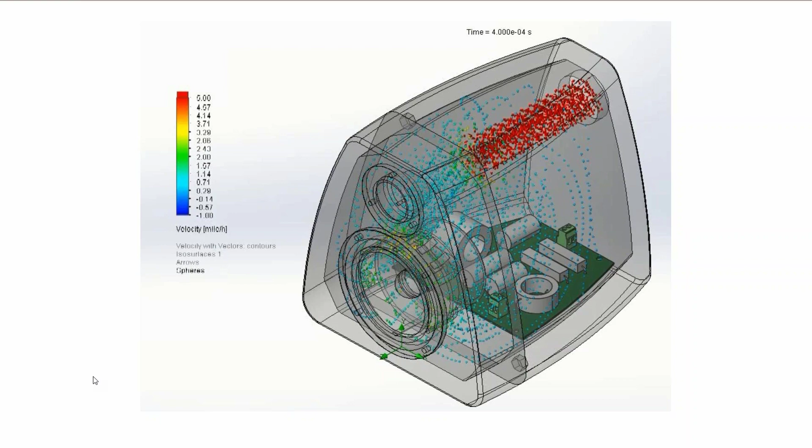So just for your own information, we did run some simulation on this speaker, and you can see at this point we were looking at the airflow through the port tube and how fast that air actually flows through that tube. Another thing we looked at is the speed of the air going around all of the devices inside this speaker. So there's a lot going on inside the speaker. We got to really put our engineering caps on and figure out, are we going to have port noise? There's a bunch of parameters that we had to design around.

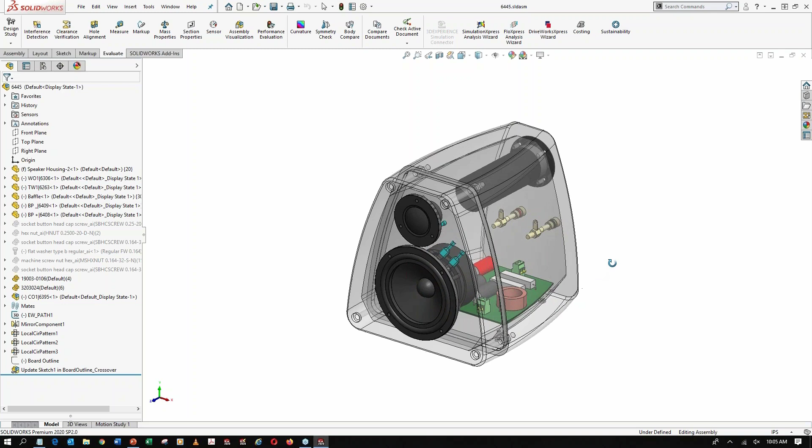In this simulation, you'll see that we actually are building an isosurface anywhere that the air speed is going too fast and it's going to create noise. So one thing that we had to design around was actually having this speaker be between 300 and 350 cubic inches internal volume. So here is a completed design, and you can kind of see this speaker here modeled. This is fully populated, the assembly is complete.

But what I'm going to do is I'm going to model this speaker completely from scratch. Everyone on here is a SOLIDWORKS user, and at the end of the day, you're going to have to hit File New at some point and model something from scratch. So no tricks up my sleeve. We're going to model it completely from scratch. So let's do that.

First, I want to point out that there is a front piece and a back piece. They slide together with these lips. You can see that they slide together, and there's 20 thousandths of tolerance, a gap around the sides, so that they actually will fit for sure. So I'm going to close this thing completely. You can see the SOLIDWORKS 2020 emblem. There is nothing open. So let's hit File New. We're going to choose a part in inches, freedom units.

Now, I'm going to talk about good practices as we design this as well. So not only are we going to model it from scratch, we're going to talk about best practices and good things that you should be doing while modeling. One of the things I like to describe that you won't see in any training manual is bulletproof modeling.

So everyone on this webinar has probably opened a model that their coworker made a change to. Definitely not you. Definitely their coworker made a change to. And one small change just made the model explode. Well, if you have bulletproof practices, bulletproof modeling skills, that change should not blow everything up. You should be able to go in, make small changes, and your design intent drive the way the model changes.

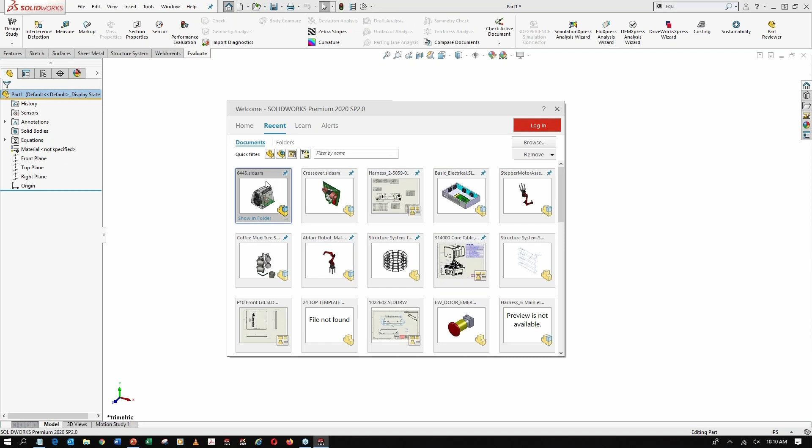Now, in SolidWorks, most SolidWorks users, we like to make box. We extrude box. We pull out of page, we make box. It's very easy. We make very orthogonal or geometric shapes, right? But some of the hardest things to do are, in fact, those curved shapes. And if I open this model up again, you'll see that there's a lot of curvature to this model. So you can see it's curving in multiple directions.

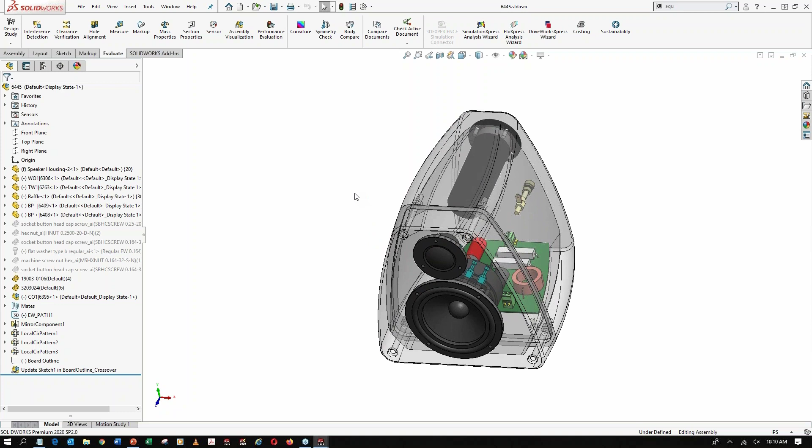And so this is some of the things that people get a little timid about. And we need to be able to have all those tools in our tool belt to be able to make shapes that are not just real blocky and me extrude box. So we're going to do that here in this brand new file. Now, I'm going to create a sketch on my top plane. And the first thing I'm going to do is I'm going to use this midpoint line. Now, this midpoint line, this is a really good one, especially if you need symmetric parts to build around your origin. So at that point, I just started with the midpoint line.

Now I'm going to use a regular old line. Now this is going to be the depth. Now, in case anybody didn't know, you can click on a line and you can say for construction geometry. You can switch it over to a piece of construction geometry. And then when I draw this other line, I could use a midpoint line, or I can pick up this midpoint reference and make it coincident with the end here, which is perfect.

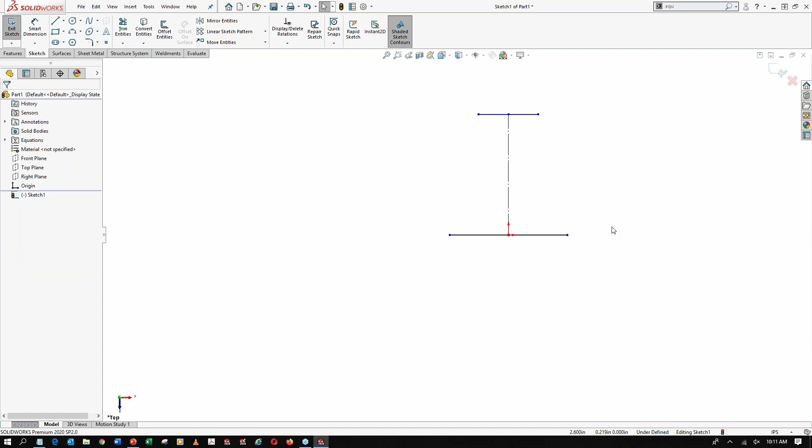Now I'm going to pick up a 3-point arc here. So 3 clicks is what it takes, said the Cookie Monster. So there we go. We have our original shape. Now I need to define this, because best practice is to always work with fully defined sketches.

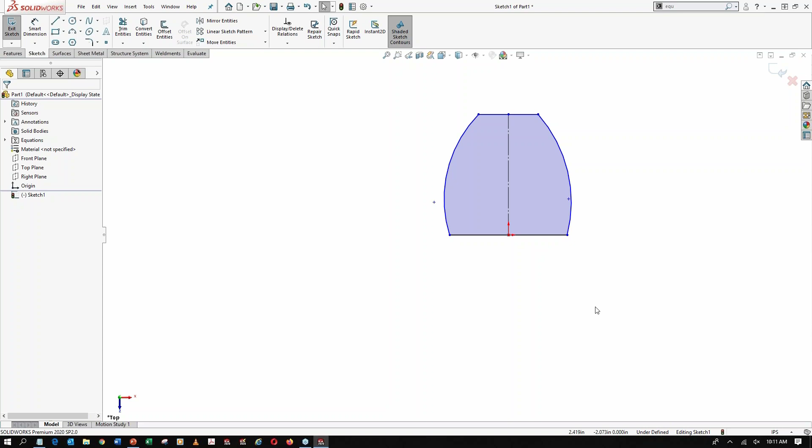This is an underdefined sketch, as said in our status bar down here in the bottom, so I do need to define this. So this one is going to be equal. So just like in Excel, when you hit the equal key, that is going to show us everything that we can link this to or start an equation. In this case, I'm going to go to global variables, and that's going to be equal to the bottom front, which is BF. And I can hit my green check, and you'll see that you get a little symbol indicating that it is linked to a variable.

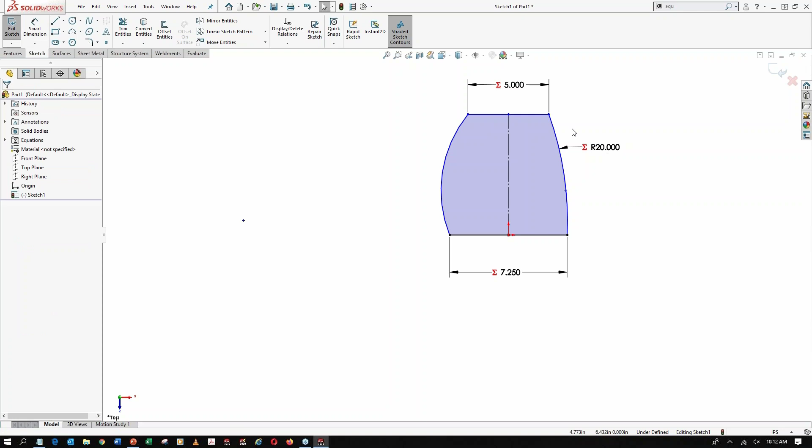I'm going to do the same thing for the backside here. That's going to be equal to the global variable of bottom back, which is BB. I can hit my green check. Notice that I'm not dimensioning. I mean, I'm dimensioning, but I'm just linking it to a value that already exists in this model. Now this is going to be equal to the global variable of curves, nice smooth curves on this speaker. And I'm going to make that one and this one on the other side equal. I like to use my context toolbar. If you're not using it, you probably should.

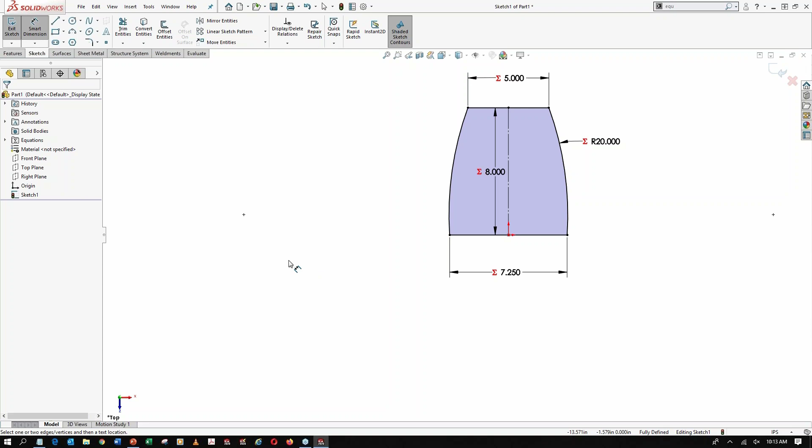One more thing that we're going to have is this one is going to be equal to a global variable of D for depth, and green check. Now this is completely defined. We have a fully defined sketch as defined in our status bar. So that's the way we want to have our sketches, is completely defined. Now I can get out of this sketch.

Now, to make something that is a little more complex, well, you could use an extrude, but we're going to use a little more complex features. You could use either a sweep or a loft. In this case, I'm going to use a loft. But to use a loft, I need another shape to go up to. Well, before I do that, I have to sketch on a plane that's up there. Well, I sketched on my top plane. So what I need is another plane up here.

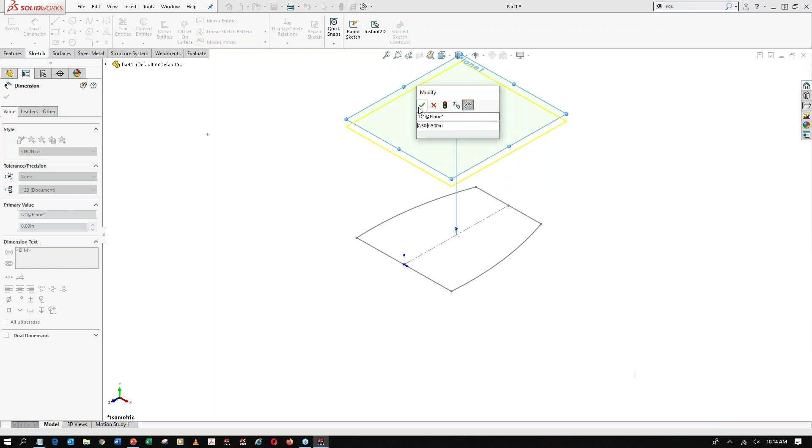So I'm going to hold control and I'm going to drag up to create an offset plane. Now, ideally, what you would do is hit equal and then link it to a variable, but you can't do that. That's just a SolidWorks thing. So I'm just going to hit my green check. But what you can do is you can link that offset plane depth to a variable, but you have to accept the plane first and then double click on the plane. And then we can double click on that dimension, and then we can link that to a global variable of h, which is height. A quick rebuild here, and you'll see my plane is in the correct place.

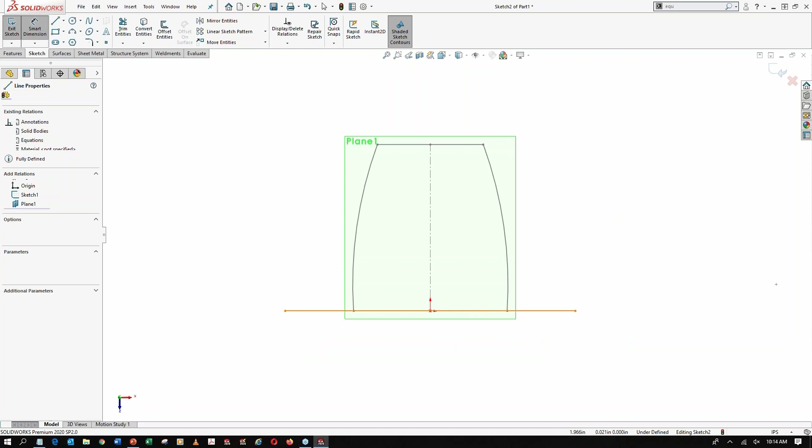I can now sketch on said plane, and I can do exactly what I need to do here. So I can draw another line again. Obviously, we could use our midpoint line if you wanted to, or you could pick up that midpoint reference and put it on the origin. And at that point, I need to define the width of this line. And that's going to be equal to the global variable of top front, or TF.

All right. Now, the next thing I need to do is do the back. So I'm going to use another line back here. You see we can draw another line. Of course, you can pick up this midpoint relation and hold control and put it exactly where you want. And then we can define that one.

Now, I use a lot of mouse gestures, and that's where you right click and you can drag through any one of these commands that you have. If you're 10,000 IQ, not necessarily that I'm that, but I've been asking for a second level for a long time. And I finally got smart one day. And instead of creating a second level on my mouse gestures, I just mouse gestured me hitting my S key. Because hitting your S key, you can then right click and customize the S key. So now just mouse gesture hitting your S key, and then you can find everything right there and customize it all. So just a little tip for you. If you like mouse gestures, then mouse gesture your S key to give you that second level.

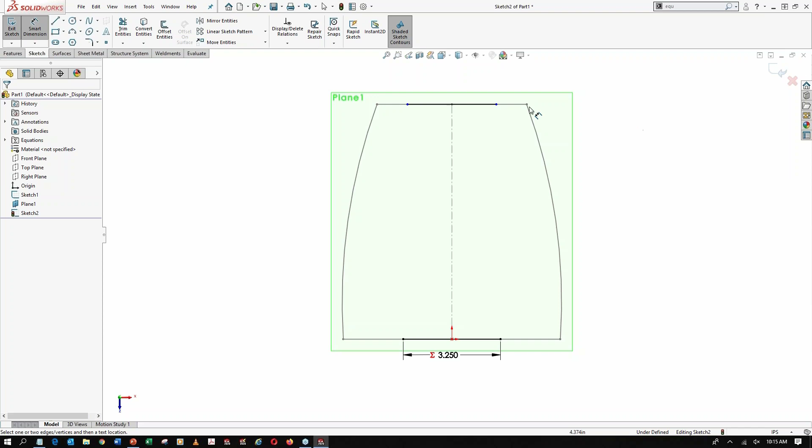All right, now I'm going to link this one to the global variable of TB, which is top back. Hit my green check. I need another 3-point arc. So go from here to there and 3 clicks.

Said the count. And then I've been watching too much Sesame Street with all this quarantine stuff. So maybe some of you can relate.

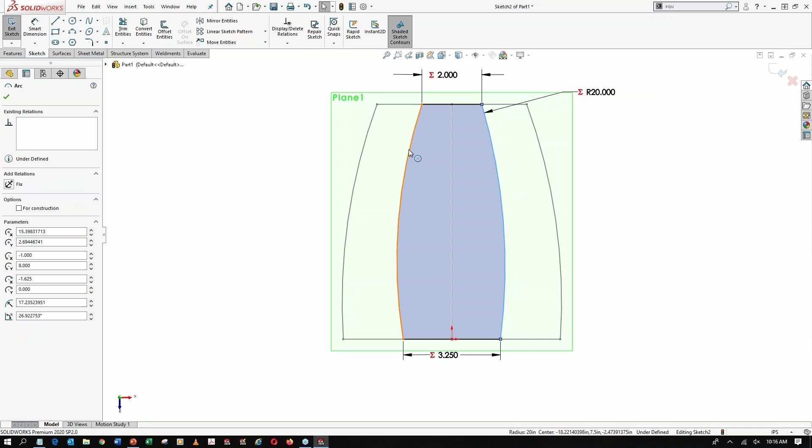This is going to be equal to the global variable of curves. And hit my green check. Again, I'm going to link this curve to that curve, making them equal, and then I can get out of this sketch.

Now, we have our framework here for our speaker, but I need some nice curves for this to follow. So on my front plane, I'm going to create another sketch that just contains 3-point arcs. So from sketch to sketch, creating like a little wireframe of this speaker. And of course, these are going to link to the global variable of curves. Hit my green check. And again, I'm going to link both of these where they're the same curvature, and then get out of this sketch.

Now, there are faster ways to do this, but I'm going to go the most robust modeling way to do this. So I could have used 3D sketches, but I'm going to use 2D sketches in this scenario. Now I'm going to take this front plane because I need to sketch the same thing on the back. I'm just going to create an offset plane by using control drag.

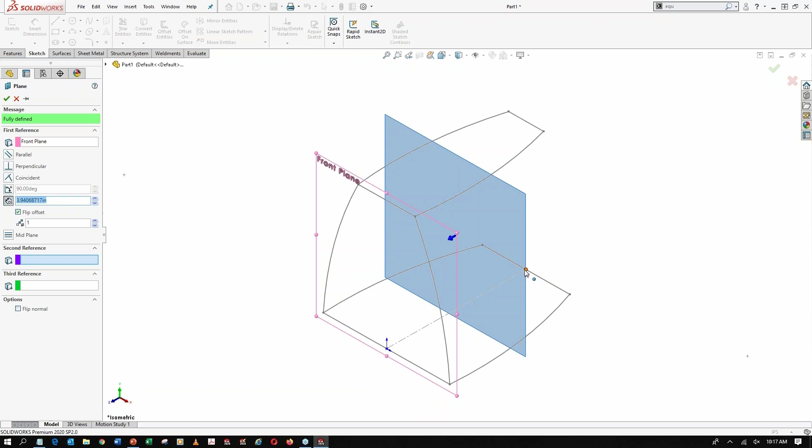But I want this model to always have a plane on the back side back here, so I can link this as an offset plane that pierces that point. So I can then hit my green check. Now, no matter what that depth changes to, this plane will always follow. So then I can open a sketch there and do the exact same things.

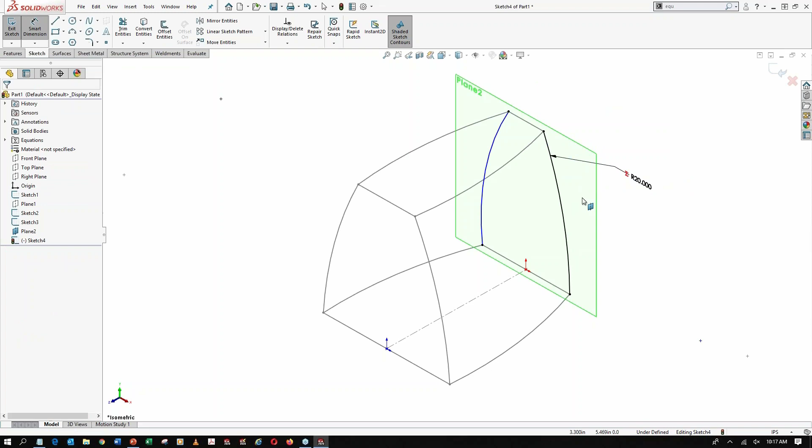Get a 3-point arc here, and then link this to the equation or the global variable of curves. And last time, make these equal, and we're good to go. Personally, I like to hide my planes, but you'll see now we have a wireframe of our speaker.

Now remember, our design challenge is between 300 and 350 cubic inches for an internal volume. Well, right now we have 0 for internal volume, so we're pretty far away. But what I need to do is go to Features and do a lofted boss base. If I loft from this sketch to that sketch, that is exactly what I need, except you'll see that our curves is going very prismatic from point to point. So I want this to follow our curves.

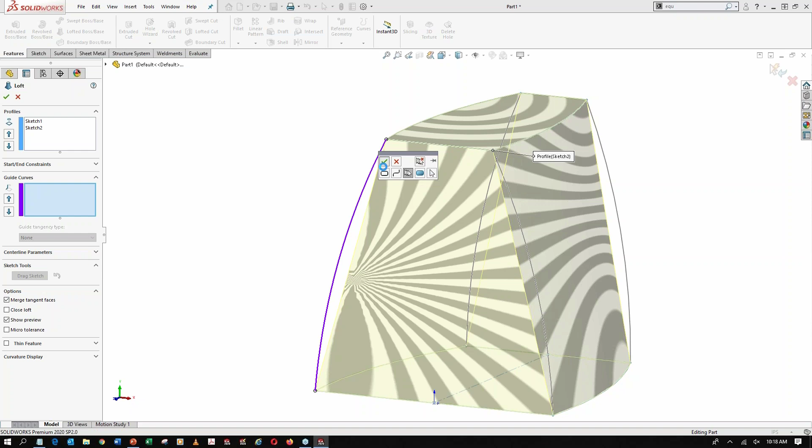To do that, I need to use a guide curve. Now, when I choose a sketch that has 2 open profiles in it, it's going to prompt me to use my selection toolbar. And that's totally fine. We'll select that group, hit my green check. I'm going to do the same thing over here. The same selection toolbar pops up. You'll see what these guide curves do is they pull it out and make it follow that guide curve.

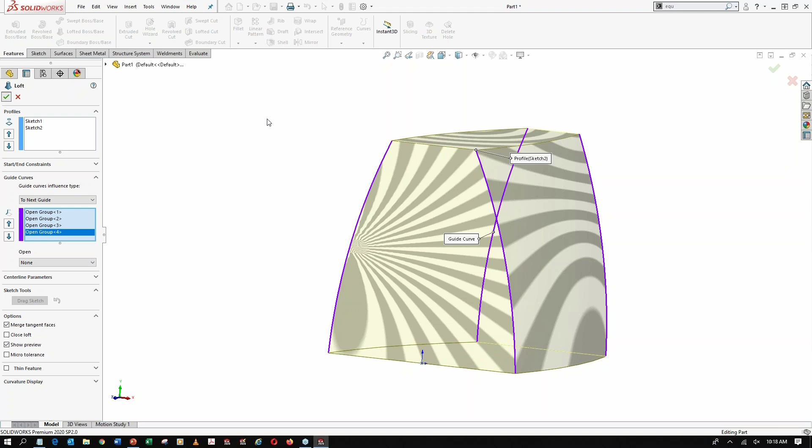So I'm going to do 2 more times. We're going to get back here, use that one, and then finally back here and use that one. Perfect. Now we're following our guide curves, and I can hit my green check. You'll see that we have some nice solid here. It's curved in a couple different directions.

But now what I want to do is check the volume. So I'm going to go here to evaluate. I'm going to go to my measure or mass properties. Let's go to mass properties. You'll see my volume is 326 cubic inches. Well, if I was shooting between 300 and 350, I would say that's smack dab in the middle. So I'm going to say that's okay.

But this is an internal volume, and this is a solid. So as you can see with our section view, I can prove that this is in fact a solid. So what I need to do now is I need a 1/2 inch wall thickness for my speaker. So what I need to do is create an offset, okay? Now, I can use the feature called shell. Now, you guys are probably very familiar with shell, and it's going to remove an internal volume.

Well, there's another feature inside of shell. Well, it is shell. But what you can do is you can say that you want a 1/2 inch wall thickness. And then you can check the option for shell outward. Now I want everyone to pay attention. When I hit my green check, it's going to get a little bit bigger. You see it kind of jump out just a little bit.

What it's doing is it's taking the faces that exist and it's offsetting it by whatever value, and that's a 1/2 inch, and then removing the internal volume. So it's like an opposite shell. So now you can see that we have the exact same volume inside that we just had as a solid. So that's a really good technique that you can use to create a cavity inside of a part. So first thing I want to do is I want to check the internal volume and make sure that it is in fact still between 300 and 350.

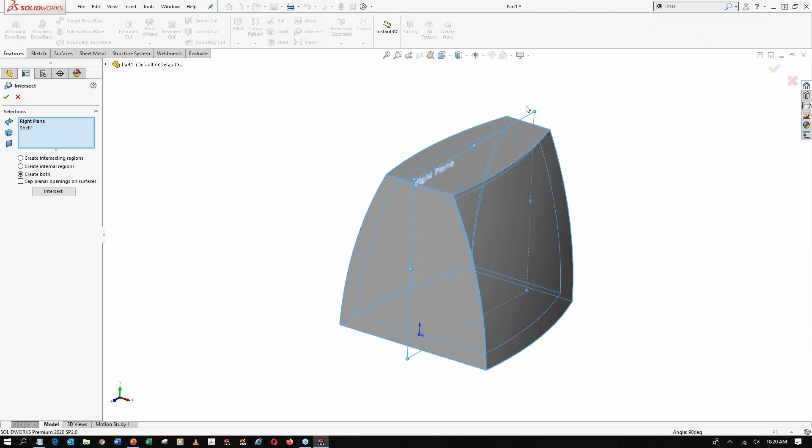A tool that I can use to check an internal volume is I can grab a plane that completely intersects that space and that body, and then I can launch this tool called intersect. Intersect is one of my favorite tools because now I can create an internal region. When I create these internal regions, I don't want to merge the result, so I hit my green check.

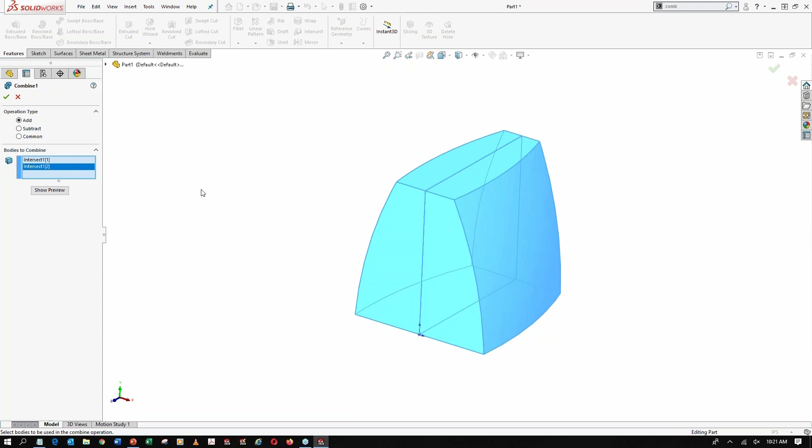Hitting tab on top of this model, you'll see that I have 2 internal pieces. I can then combine them together. This is like a Boolean addition or subtraction. In this case, I want to add both of these solids, and the reason I have 2 is because it was split down the middle by that right plane. But we were then able to get the internal volume of the overall speaker.

So now I can add those together and evaluate mass properties, and don't include the hidden bodies because we have that thing hidden. You'll see that I am at the exact same size that I was earlier. So now I can come back and delete that body, that way I just have a feature in the tree. We're deleting that combine, and then I can re-show my speaker. And again, this thing is hollow.

Now what I need here is I need to add some fillets, so we need this thing to be nice and rounded. Let's go back up to the fillet command. Now I want to point something out. Everybody uses manual fillet, well, most people use manual fillet. There is also a FilletXpert.

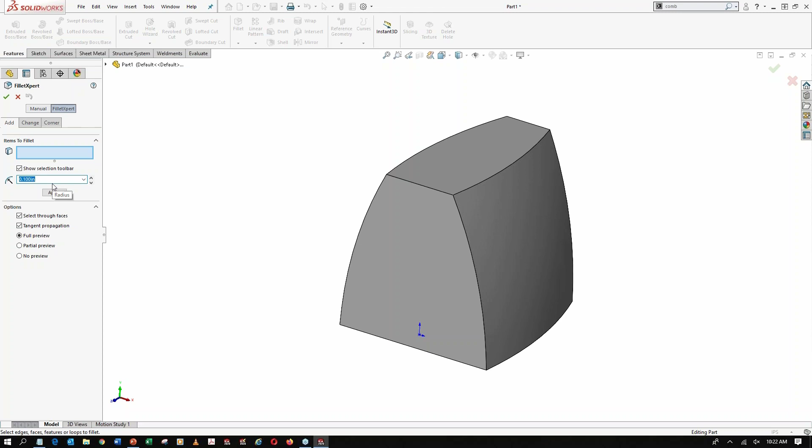What you can do is add multiple sizes of fillets in one go. So I can say that I want a 3/4 inch fillet, and I'm going to add it to all 4 of my external corners, like that. And then I can hit apply. Then I can come back and say, you know what, I want to now add an 1/8 of an inch, and I want this to go all the way around the front and all the way around the back, and then I can hit apply. Notice that with this green check, I added 2 fillets at 2 different sizes in the same command.

Now I have 2 pieces that this is going to have to be. So I'm going to need to cut this, but I'm also going to need to screw them together. So to screw them together, I need some space for my 4 mounting bolts.

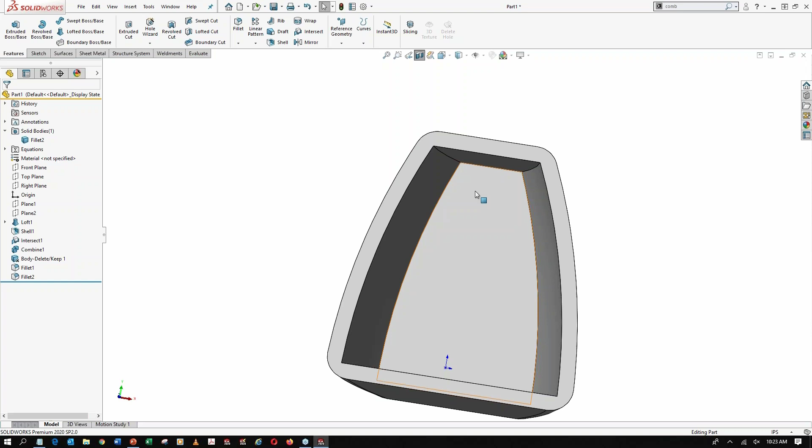Now if I cut this model and section it and accept that section view, I need some material to follow this edge so that we have some meat there so that we can actually put a screw. One thing we could do is just extrude a boss, but I want something a little more sexy, a little more smooth that can follow our speaker contour.

What I can do is create a sketch on this back face, convert the entities, and then draw a line. When I convert those entities, it's going to pull all those edges right over there onto this sketch so that I can use them.

Now on this one, I want this to be a specific distance across. So for the back, I want this to be a 1/2 inch wide, and then from point to point, I want that to be a 1/2 inch tall. So a 1/2 by 1/2.

Now I have too much here. What I can do is trim away, get rid of all the stuff that I don't need. Now I want to point something out, this is something a lot of people haven't realized. There are these red dots. If you go too far and accidentally cut too much, obviously you can hit Control Z, but if you just keep holding and then back up through that red dot, you'll see that we can undo the things that we cut. So just keep that one in your back pocket.

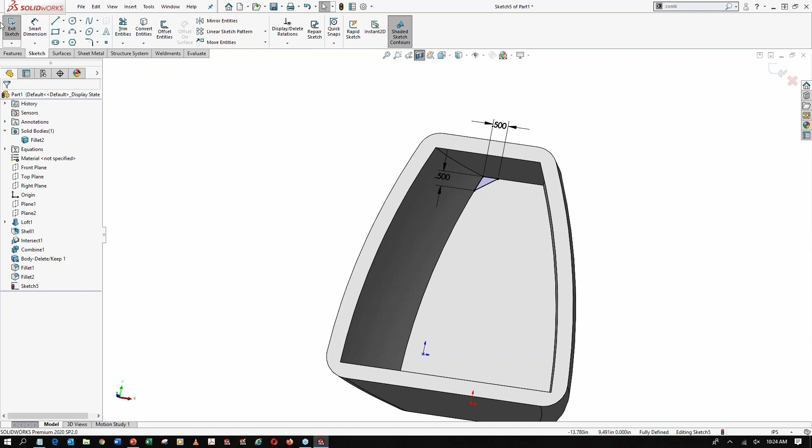I can then get out of that sketch, and I'm going to create another sketch up here that converts these entities again, and I'm going to create one down on the bottom. So I'm creating sketches that we can use to loft to create our mounting bosses.

So this one, bottom back, is going to be 3/4 of an inch wide, a little bit bigger, and then it's going to be 1 inch tall.

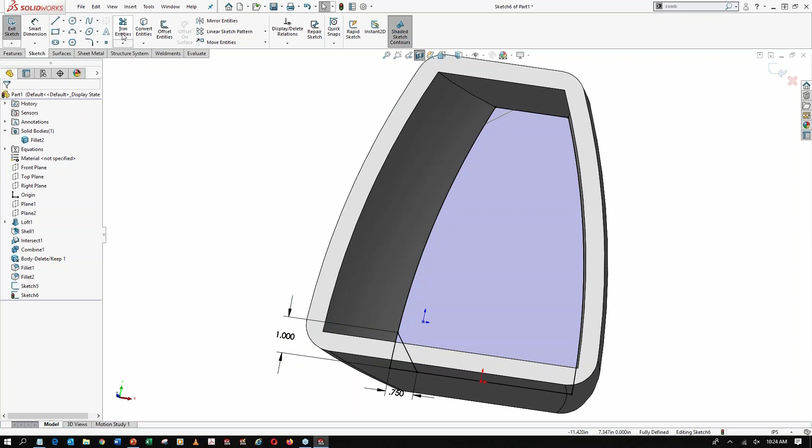Now again, I want to make sure that I only have a single closed profile in here, so I use my trim entities, get rid of all that, and once it highlights in this blue shaded color, that is SOLIDWORKS telling me that my sketch contours form a closed contour. All right, now I can get out of there.

I have my two sketches in the back, but now I need to sketch in the front. If I hit section again, I need to flip the direction that I'm sectioning, and then I can sketch in the front of this thing. So now I can create a sketch on this front face and do basically the same thing, convert the entity, and then draw a line that goes from that edge to this edge, and give this a height.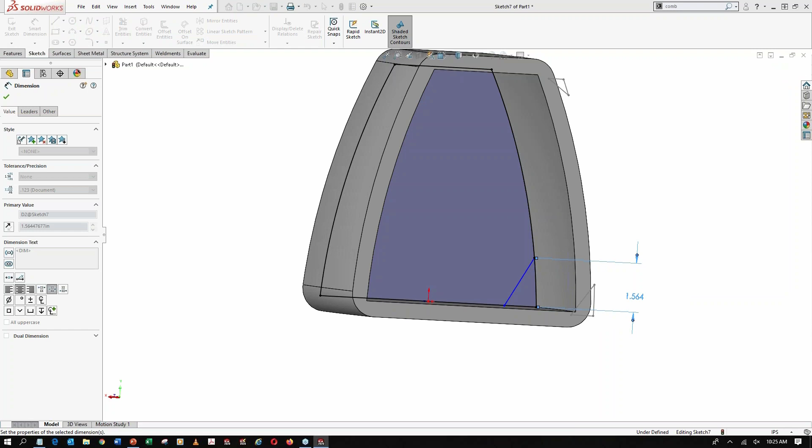So from vertex to vertex, that's also going to be 1 inch tall. And then from that vertex to that vertex, that's going to be 3/4 of an inch.

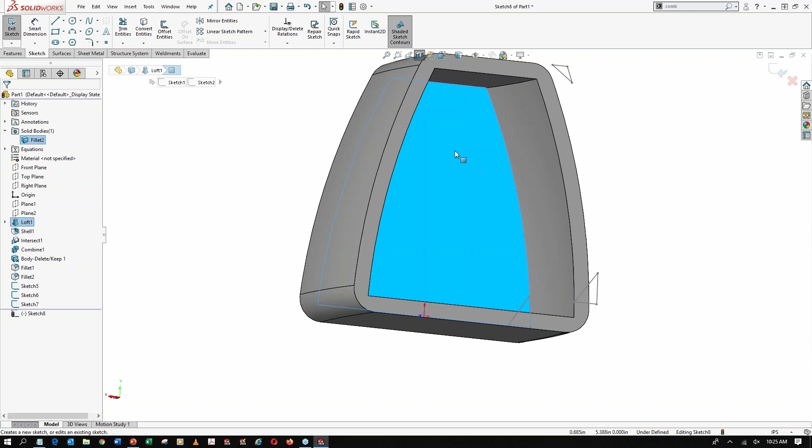Now, this is one of those things that you could also link into your global variables like we talked about in the beginning, or this is something you can do on the fly. Best practices say that you would probably link this into your global variables, and that's okay. It's going to be, just like I talked about earlier, a better place to go to one stop and make all of your changes.

One more sketch here, convert these entities, draw another line, and then hook this up and make them coincident. And then finally, the top front is going to be 3/4 of an inch tall, and it's going to be 3/4 of an inch wide.

Remove all of my extra stuff using our trim command, and I can get out of my sketch. Now I have 4 sketches here, and I can turn my section view off. Now with these sketches, that's exactly what I need to do a loft, so from one profile to another.

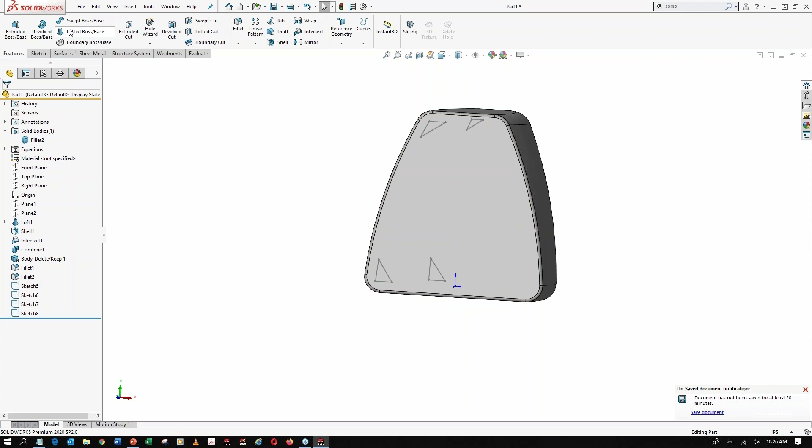Now I can go to features and do a lofted boss base. Now I'm lofting inside this model. So if I loft from there, you see I get my preview and I can hit my green check, and it succeeds, but that might not be exactly what we want.

And so let's flip this and look inside this model. So if we're 3D printing this, this is going to be a huge design challenge. What we need to do is make this loft follow the curvature of the speaker.

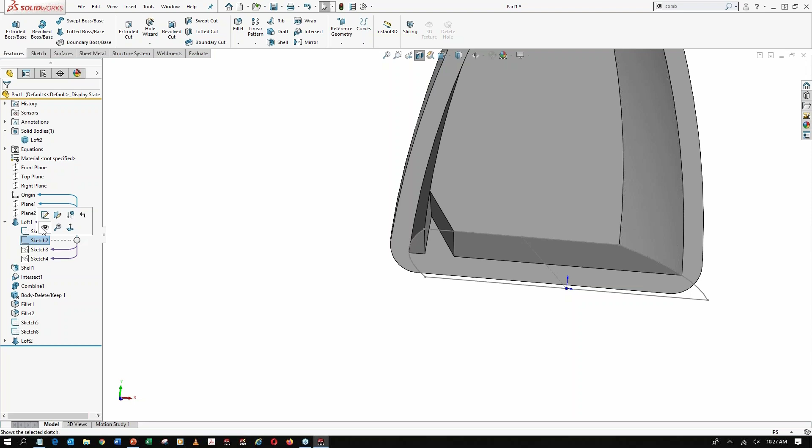So to do that, I can then go to my original loft and show the sketch for the bottom and the top. Now, what we can do is leverage these sketches so that we can use them again. So let's go edit our loft here.

And this time I'm going to use a guide curve. But if I choose this, notice that it grabs the entire sketch. That is not what I want, so I'm going to clear that selection.

Instead, I'm going to right click and use my selection manager so I can grab just one segment inside that sketch and then hit my green check. You'll see now that if I hit my green check, this loft is drastically different. It follows along the curvature of our speaker.

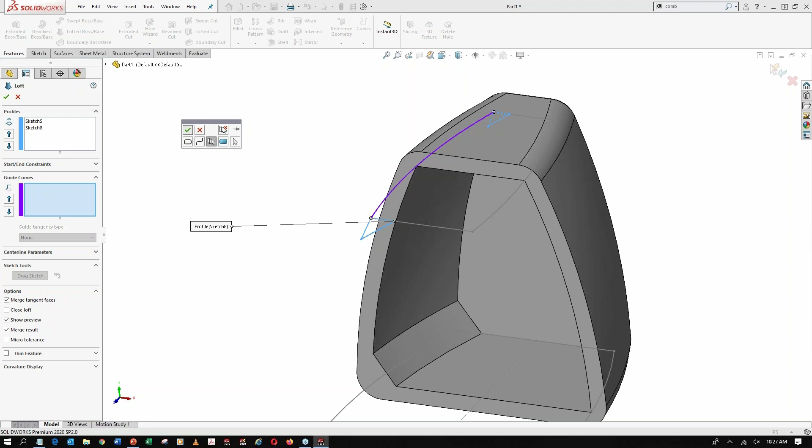I'm going to do the same thing for this top side, but I'm going to leave it sectioned so you can see it happening. Loft from this shape to this shape, and obviously it goes straight forward. Guide curve, I'm now going to use my selection manager and use this to follow, hit my green check, and then hit my green check again to accept it. So you'll see that we have a lot more meat there now, so we can put our mounting bolts.

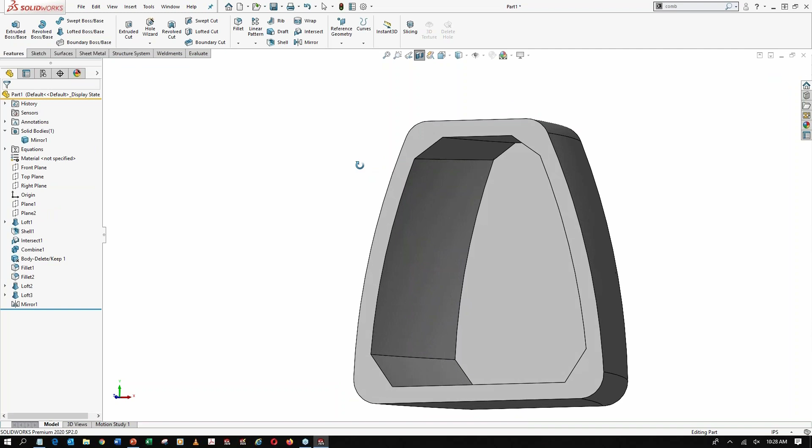Now, to speed myself up, I should probably do that all over again. I'm just kidding—please don't, unless you're getting paid by the hour, I guess. What we can do instead is take both those lofts and the right plane, and use the mirror function so that we can mirror them to the other side, creating some symmetry. So perfect, we have sped ourselves up, and we have designed this speaker so that it has a good internal volume.

Now, I want to do something really quick. I want to do another intersect to check that. So let's go to the right plane and this solid, do that intersect command, and we're going to create an internal region and hit my green check.

Again, I can hide this, and we can take both of these and combine them together. And once you combine them together, that solid and that solid, we can then do the evaluate mass properties. You'll see we're at 317 cubic inches. We're still within spec, so we're good to go.

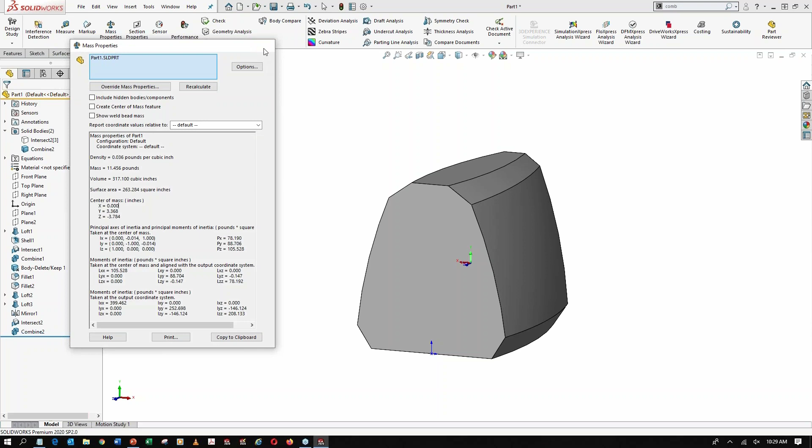I can just delete both those features, or you can leave them in your tree—it is totally up to you. But now that we're back to looking at our model, and you see it's hollow, what I need to do is cut it in half. So to do that, I'm going to create a sketch on my right plane, and I'm just going to draw a straight line. Now, it's going to be a fully defined straight line, but it's just a straight vertical line.

I'm going to start to dimension this thing, and I want this to be equal to the global variable of height times 1.5. So you can even use those global variables in equations to modify those dimensions.

Now, I want the front piece to be 1.25 inches back. So this is how big our front and back piece will be. We're going to create a housing basically, and then a front cover.

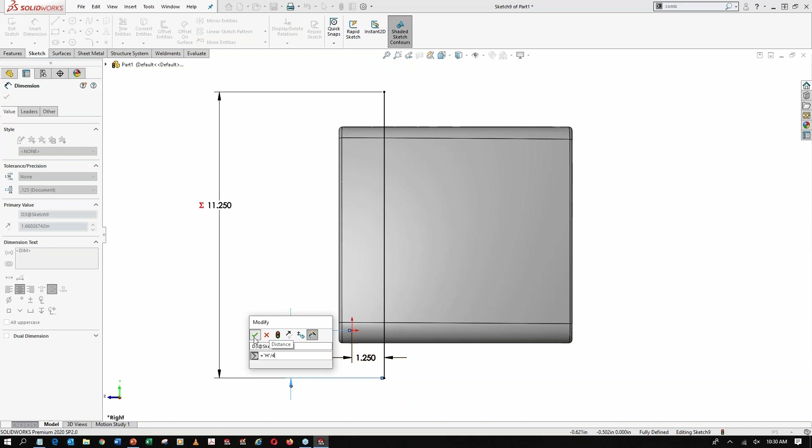Now, I also want to define how far this point is from our origin, and I want that to equal the global variable of height divided by 6. All right, and that puts us in the right spot. So you can see that this is going all the way through our model.

Now, one thing that people usually are not utilizing enough is surfacing. A lot of times you say that word and SOLIDWORKS users will kind of cringe, like, surfaces. They're not difficult, they're not hard.

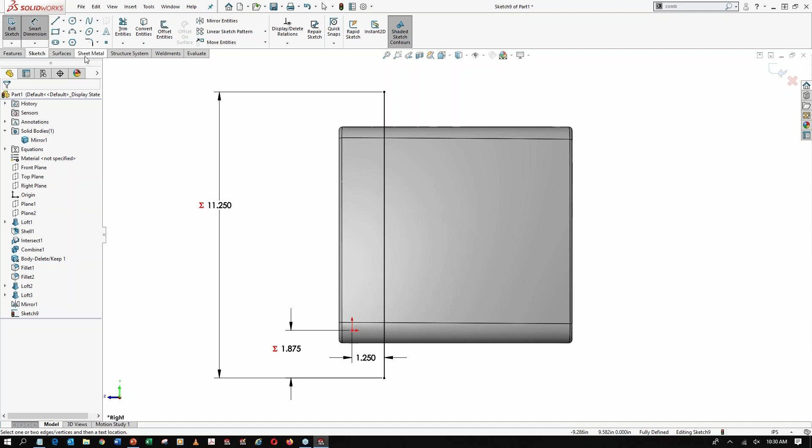What you can do is go to surfaces and say extrude surface. Surfaces are very similar to solids. You can pull it out a blind direction, or in this case, I want to choose a mid plane. And I want this to equal the global variable of the biggest one, which is bottom front, so BF, times 1.5. That should get us all the way through the model.

That means no matter what you change the speaker to, the surface that we're creating will always be larger than the model. Then we can hit our green check.

So what we have now is a solid body and a surface body. We can now use the surface body to cut, but surfaces by definition have 0 thickness, so I can cut this model without removing any thickness at all.

If I choose cut with surface, I have to remove a side. Instead, I can use the tool intersect again.

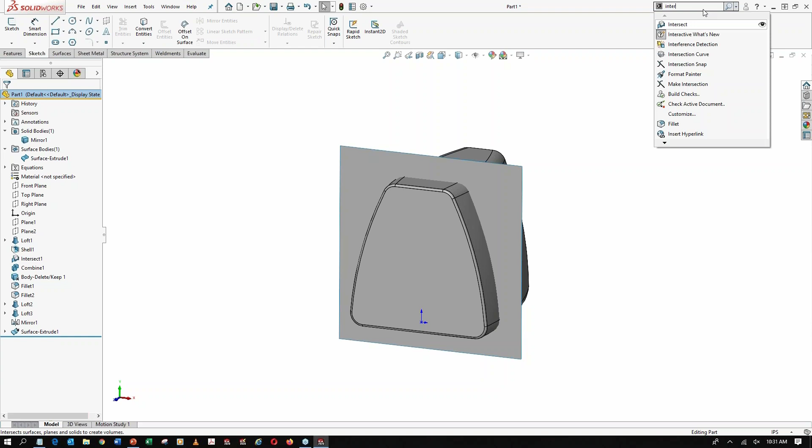Using intersect, I can create an intersection between the surface body and this speaker body. This time, I want to create intersecting regions and hit intersect.

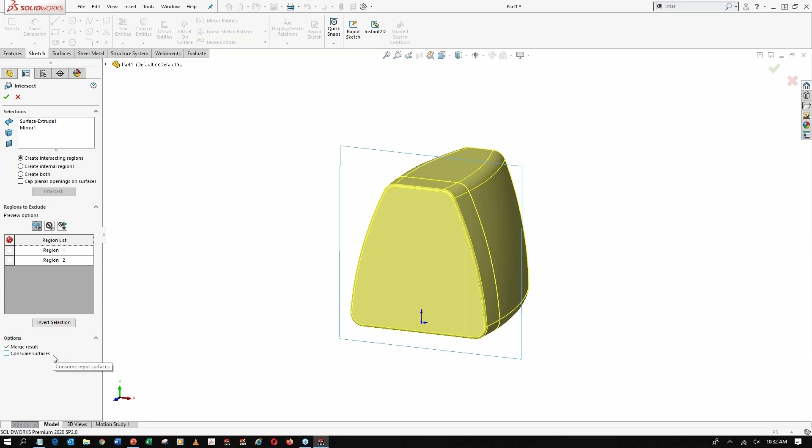Now, one thing that'll get you when using intersect for the first couple of times is the option of merge result - sometimes it's even collapsed. You'll be like, what the heck's going on, SOLIDWORKS? Uncheck merge result, and then instead of looking exactly the same, it'll look completely different. It'll be cut in 2.

Now, there is a feature inside of SOLIDWORKS that will create a lip and a groove for you. It is literally called lip groove.

Now, before we go down this path, I'm going to hit save. We're going to save early, save often - it's the SOLIDWORKS motto. Speaker, save.

All right, so I'm going to use the lip and groove command. Now, remember, if you don't know where it is, you can come up here and search, and look like you remember where everything is all the time.

Now, a lip and groove is going to require two separate bodies. Lo and behold, we now have two separate bodies. I want this component, or that solid, and that solid.

I need to choose an edge to follow, so I'm going to choose that edge right there. Now, our groove selection is going to be based on this face, and I'm going to choose my outside edge, which in this case is going to be that edge. So you can see selecting that edge will do it for me.

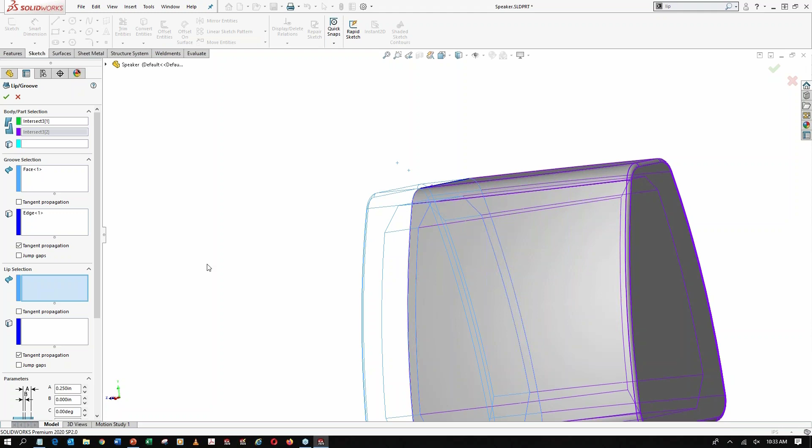And now on my lip selection, it's going to be on the other solid. I'm going to choose that face, and then the edge that I want to follow is going to be the outside edge right there.

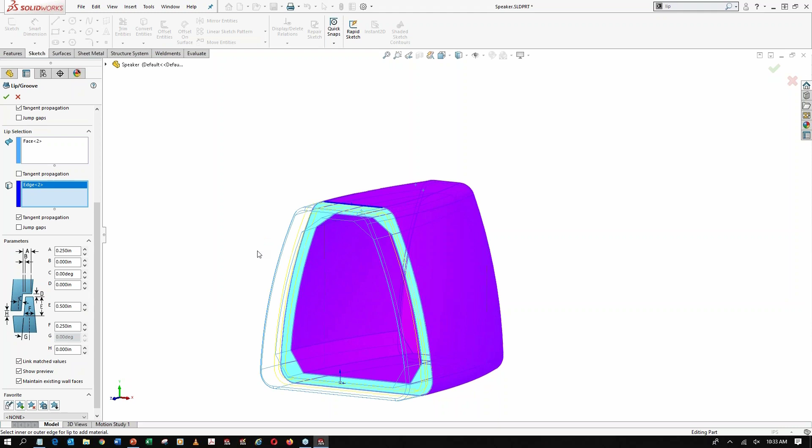And then the specifications, kind of where the rubber meets the road on the lip groove command, is all of these specifications. Now, in this scenario, we're just going to let it be 0 degrees of draft, and we're not going to put any tolerance here because I want you to see what the lip groove command does, and then we may or may not use it.

So let's hit our green check, and you'll see that it's going to start to modify your model. It might even give you warnings like, hey, we're going to make this, but it's not going to be 100% right. Okay, SOLIDWORKS, show me what you got.

So if you zoom in here, you're going to see that it kind of pulled it straight forward. It didn't follow the curvature of our speaker perfectly. You see these don't line up right. Now, it created the lip and groove, which is exactly what we wanted. So now our front piece can slide into our housing. But the problem is our curvature isn't right.

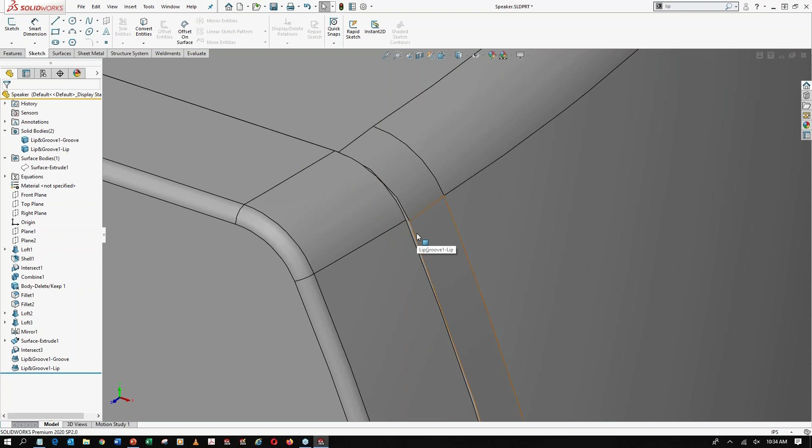So if we were to go 3D print this thing, these edges are going to be pretty gnarly. They're not going to line up perfectly. So you can see how they're not going to line up. Now, unless you just want to go out there and file away or sand it away by hand, I personally don't want to have to put all that elbow grease in. Why not get it right the first time?

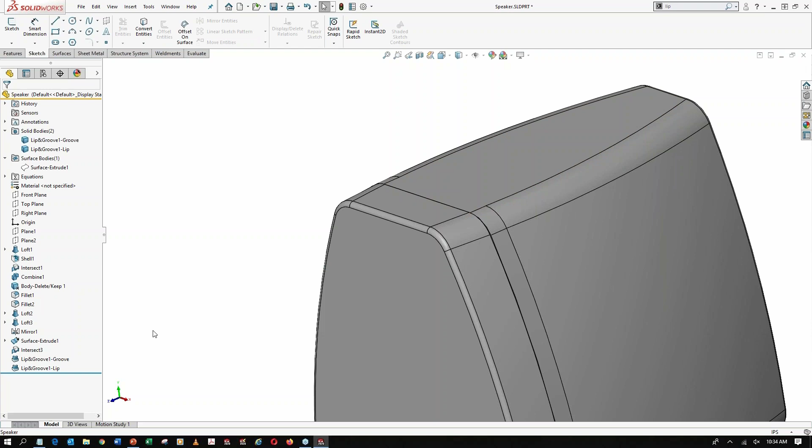So you can see here's our lip and our groove on our model. And again, Shift Tab will show everything, and Tab will hide everything in case you didn't know that. But because this lip and groove did create geometry, it obviously did work, but it's not working as well as we want. So what I'm going to do is I'm going to trash these lip groove features, and I'm just going to get them out of here. So we're back to these being solids. There is no lip or groove.

So now what I'm going to do is I'm going to do it manually using surfacing. And I hear some of you going, oh, no, don't do that. It's going to be cool because surfacing is really fun. So don't be scared of surfaces.

But what I'm going to do is take this surface body that's hidden, and I'm going to go to my surfaces command and do an offset surface. Now I want to offset this by 1/4 of an inch. That's how much overhang I want, but I want it to go back into our housing. Hit my green check. So now I have another surface offset from our first one.

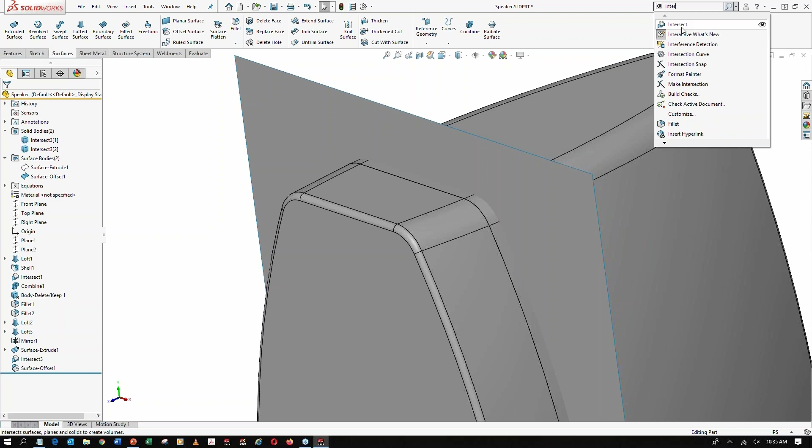Then I can use the intersect tool again, and we can use this to cut. So I can do another intersect between that surface body and the back housing, creating an intersecting region. And again, don't merge the results, otherwise you're just going to have the exact same thing whenever you come back. This is the geometry in the middle. I'm going to hide the cover and hide the housing. This is the geometry that we want to split.

We want to rip it in half, and then we're going to add some to the back piece or the housing. We're going to add some to the front piece or the cover. So to do that, I'm going to also add 20, can't even think today. So 20 thousandths, not 20 millimeters, that'd be a lot. 20 thousandths of an inch of tolerance in here.

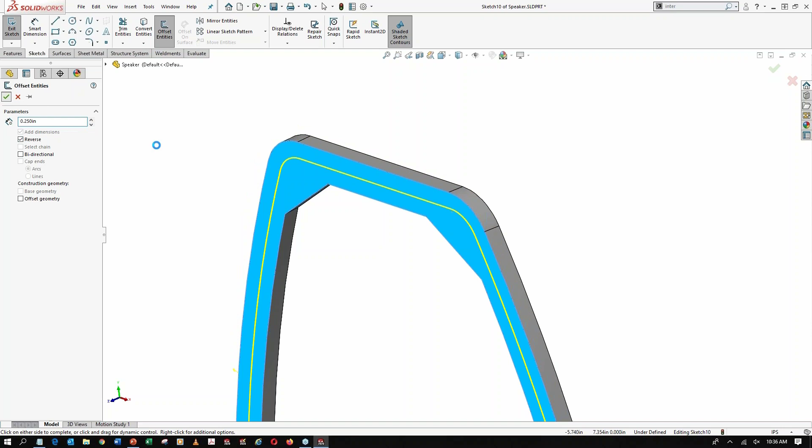So by creating a sketch on this face, I can then do an offset entities. And because this is a 1/2 inch wall, I can then offset it by 1/4 of an inch in the opposite direction, and that should be smack dab in the middle. And in fact, it is. So then we can use our surfaces and do another extruded surface, and we can do this mid-plane, and we can just have this like 1 inch thickness. So you can see that it's going through our model. And in that case, it's intersecting everything.

And then we can use that tool, intersect again. This is one of the strongest tools out there. Hopefully you guys have realized that. We've used it a couple times now. We're going to create both this time, internal and intersecting. You'll see that it has two separate selectable bodies. We are not going to merge them.

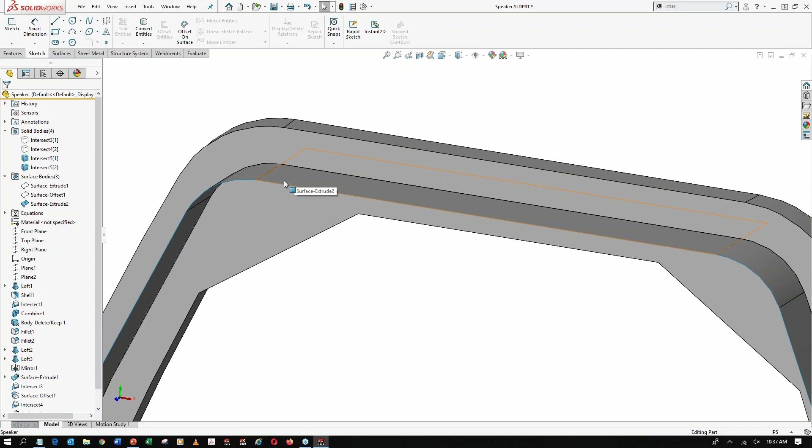Hit my green check. And then to create our tolerance, this is going to be an interesting one, because if I were to hide that surface, the surfaces have 0 thickness, so I remove 0 geometry, I just cut it. But what I can do now is I can offset that surface again. So surfaces, offset surface, and instead of that face, I want to offset this entire surface body, so that one. And I can offset this by whatever our tolerance is, so 20 thousandths.

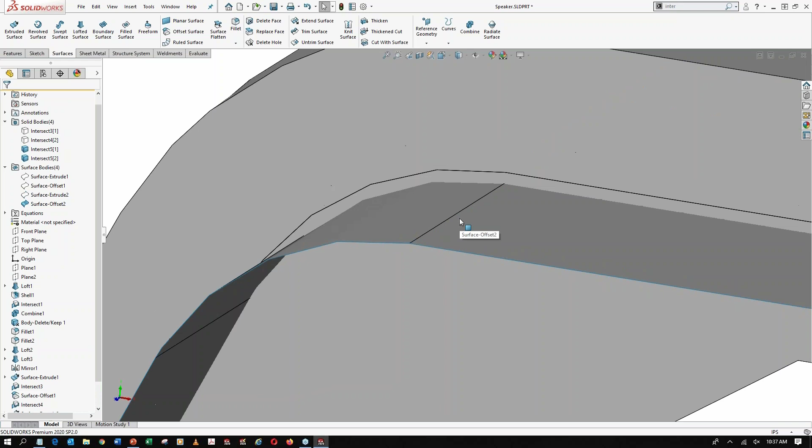Now I want to make sure it's going into, I want to remove the internal part, and I can hit my green check. You see now we have 2 separate surface bodies, so I can then hide the outside. Now, whenever you do a cut with surface, you might be cutting more than what you're anticipating. So let's not do that. Let's do a cut with surface, and let's cut this. And I can go down here and I can check that I am cutting the correct direction. And in fact, I'm not.

You can see that arrowhead is pointing inward, indicating that we're going to remove all the internal geometry. I want to flip it using my arrowhead. Another thing I want to do is feature scope. I don't want it to auto select. I only want it to cut this body. So this outside body is going to stay put.

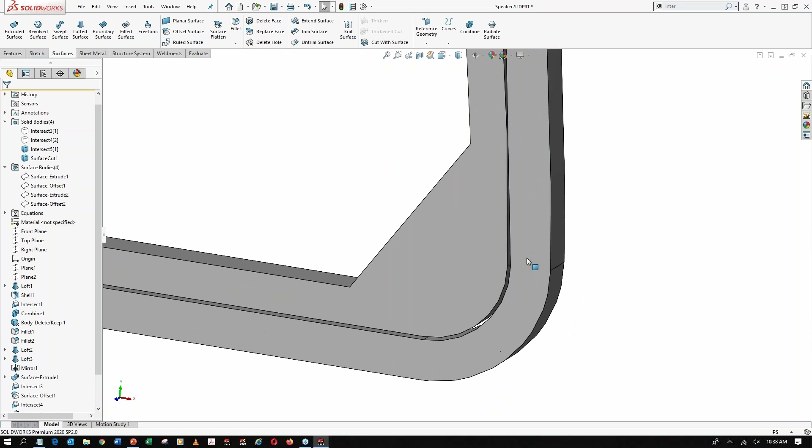So by using a surface cut or a cut with surface and choosing the correct direction, and then having the feature scope only cut that specific body, I'm not removing anything except that little gap. So now you can see we have our 20 thousandths of tolerance all the way around our model.

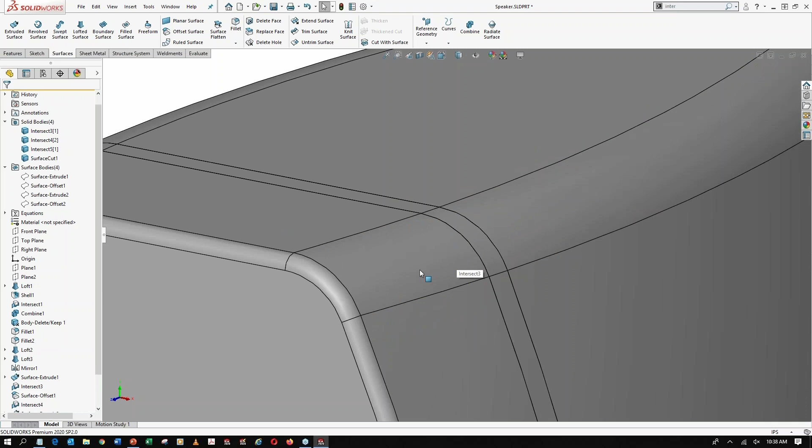Now all I have to do is show the housing and show the cover, and then again use Shift Tab to bring those back. You see my curvature lines up perfectly because we literally just cut the model apart, and then we cut that chunk into halves, and now all I have to do is add it. So say I want to take this solid and that, and I'm going to add them together.

So again, we're going to use the combine feature, and we're going to say, you know what, I want that solid and I want that solid. I want to add them together and hit my green check. That is now one solid. I can then hide that one and show my cover and do the exact same thing, combine, and I'm going to take that solid and combine them together.

So with that said, you can now see that we have our nice, pretty, rounded speaker that has our manual lip groove here, and the curvature is perfect because we used that model with some surfacing techniques.

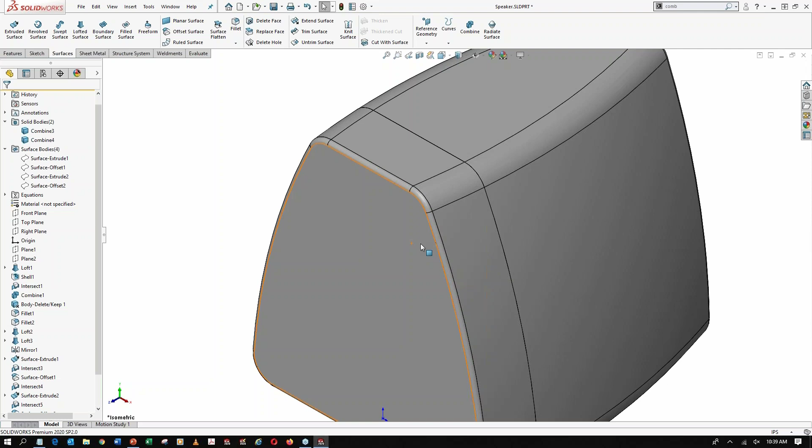Now, talking about modeling challenges, I want to move from a single part design all the way into a very large design. So I'm going to go ahead and save this in case anybody has questions about it, but I want to step into something a little more challenging. And one thing that I see a lot of people using is weldments, and that's great. But one thing that might speed you up is to use this thing called structure systems.

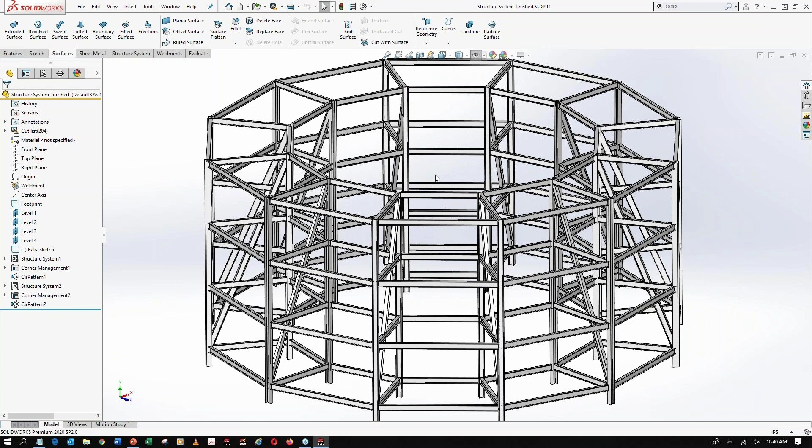Now, this is a completed structure system, and you can do this with weldments, but that can be challenging. It can take a lot of time to create all of these members and do all the trimming that you have to do to create a structure such as this. So let's open this thing up, and we're going to create that structure system from scratch. So one thing I want to do is go to structure system and activate a structure.

Structure systems are comprised of primary and secondary members. It is weldments on steroids. So our primary member, we're going to choose our profile, just like in weldments. And then all we have to do is specify where our members are going to follow. In this case, I want to use a point up to plane. So I'm going to go up to that plane, and I want this point and that point to go up to that plane.

Now you could always say that there's a direction of extrusion if you wanted to, but we're not going to do that in this case. So go up to that plane. Hit our green check to accept those primary members. Now that I have primary members, let's do some secondary members. And there's two ways to design secondary members. There's either by plane or by points.

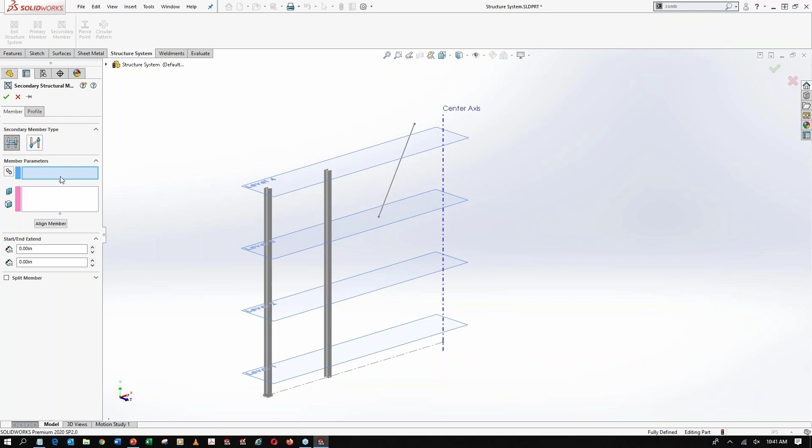So I'm going to do planes, and then you select your primary members and then what planes you are going to use. So very quickly, you can add these members in here. All you have to do is choose your pierce point, and in this case, I want to line it up with the top there. Now I want a couple more members.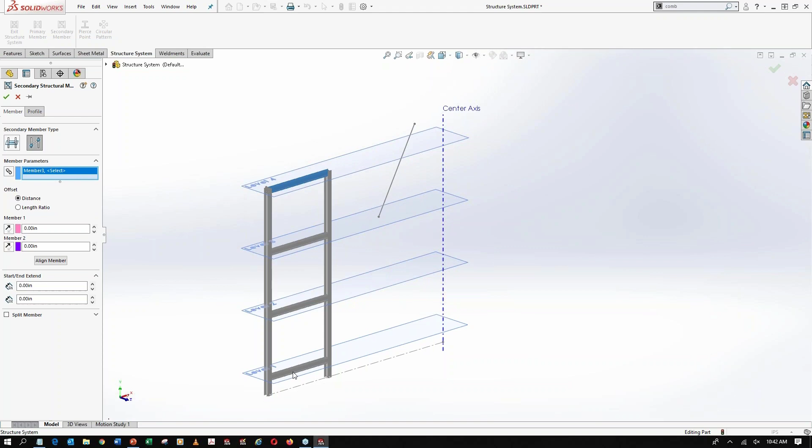Now really one member trimmed a couple times, so I can do a secondary member, this time using points going between that top secondary member and the bottom secondary member. So I want them to be on the edges, and then I can go to my profile and I can rotate that 90 degrees. And then I can even split it. So I can say, you know what, I want this member to be split around that member and around that member, and then I can hit my green check.

Now, where the rubber really meets the road on a structure system is the trimming. So you can spend a ton of time using the trim command when using weldments, but you don't have to when you're using structure systems. So I can hit exit structure system, and this is where it's going to do simple, two-member, and complex corners.

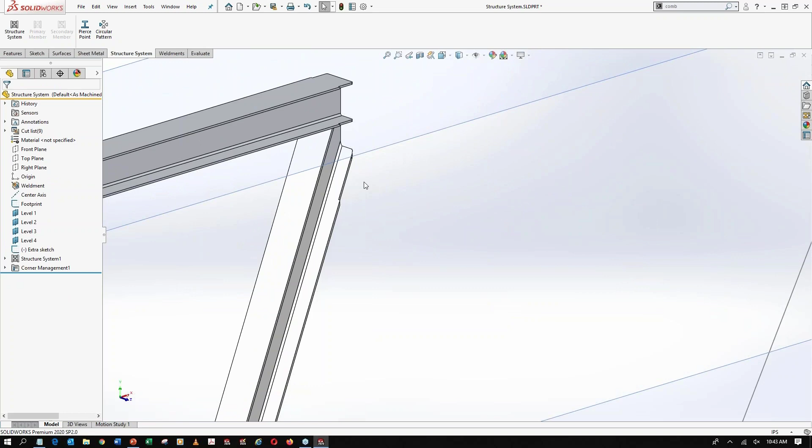So in this case, for both my simple and my two member, I'm going to use the same trim mechanisms, but for the complex trims, I'm going to go ahead and let SOLIDWORKS figure it out. It's smarter than me. It's a computer. So I'm going to hit my green check. And it's going to do exactly what we need to do for our corner trims. You can see here that everything is nice and trimmed up.

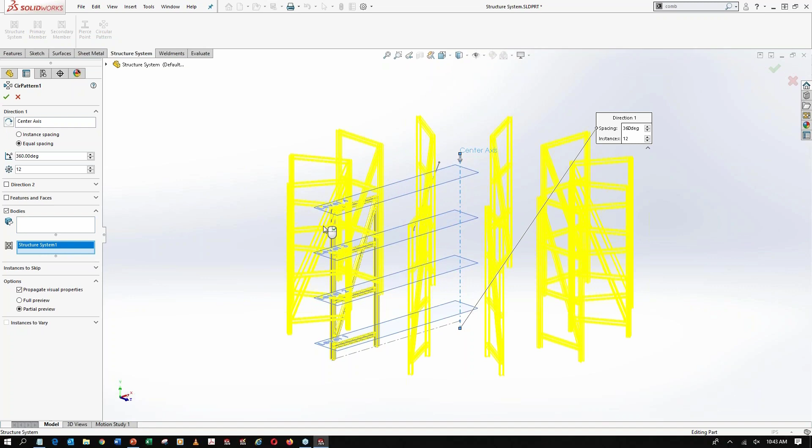So what I need to do now to add to this structure is to actually leverage some of my other SOLIDWORKS tools like circular pattern. So I can say, you know what, I want this to spin around my center axis. But instead of clicking all of these bodies, in 2020, we now have the ability to use the structure system and pattern the entire structure, and I can get 12 of those. So that's a way that you can really drastically speed up your weldment designs.

Another thing you can do is create a brand new structure system based solely on secondary members. So you can say, you know what, I want it to be between these 4 members, and I want to place it at these planes. And so now we have these members going in between. Again, choosing my pierce point to line it up with the plane, hit my green check, and again, exit the structure system. And this time, let SOLIDWORKS just use the body trims and hit my green check. So everything is trimmed appropriately.

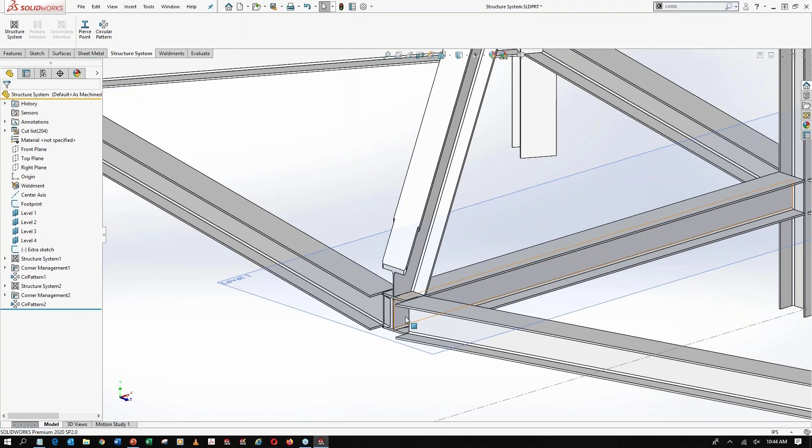And then what we can do is do another circular pattern that goes around the center axis, and again, pattern the structure, but this time, just that secondary member structure. So you can see very quickly, we're able to create something much more complex than just using weldments, and all the trims are perfect. Everything is exactly where it needs to be, and we didn't have to do much. We started this thing from basically 2 points. So that's a way to really speed up your weldment designs.

Now, another thing that I want to talk about while we're on this webinar that I see a lot of people could really benefit from using is something called detailing mode. Now, detailing mode is actually new for 2020. So for those of you not using 2020, I recommend you get on it. But if you're using large drawings, I would recommend that you open it in a new mode called detailing mode.

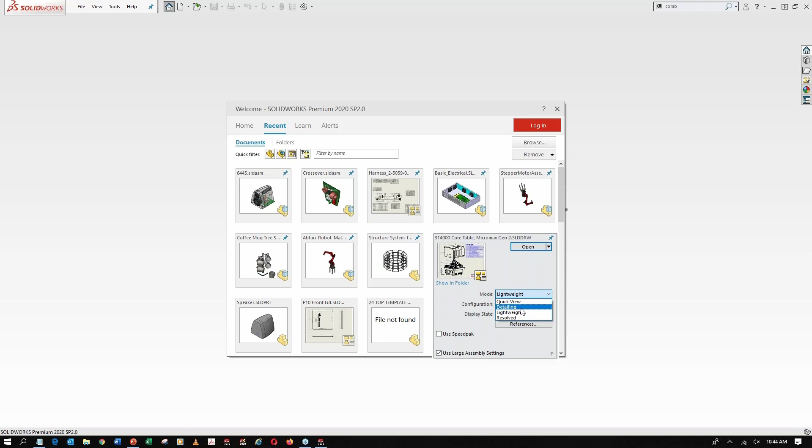So I'm going to open this drawing that has over 5,000 unique parts. And it even tells you, hey, in detailing mode, these are the things that you can do. Cool, thanks SOLIDWORKS, thanks for the info. But you can see how fast this drawing opens. Now, for those of you that are using large drawings and you open a drawing, go get coffee and come back, this could really speed you up.

So this is not just like quick view. This is something where you can modify the actual drawing. You can come in, you can make notes. So if you have standard notes, you could drop those notes into the drawing. And this is the real drawing. This is not a quick view or a snapshot or anything like that. Notice how quickly we can go through all the different pages here.

Now, another thing that I see people using in large assemblies is not necessarily just large drawings, but also just the assembly itself. And assemblies such as this little XYZ table here, we want to go look at this. And we're going to open up the assembly. And I opened it from the drawing using Open Assembly. And there's some tools that I see people underutilizing, and that's performance evaluation.

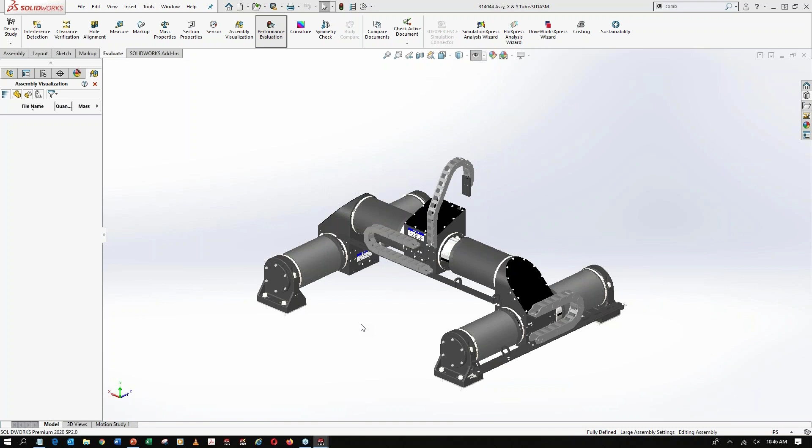When you click on performance evaluation, it's going to bring up information about this assembly. It tells you how many files are in it, how many documents are in the newest version, how many might have too high of an image quality, things that could negatively affect your performance. There's also this tool called assembly visualization, which I love. This is one of the things that I use on support all the time. And this really opens your eyes as to how your assembly is made up.

So when you choose assembly visualization, you'll see that there's a couple columns by default. There's a quantity, which is super helpful, especially if you have 1,000 screws inside of a file. You want to know how many are in there. There's also a total number of graphics triangles, which is how dense a file is from a graphical or face perspective.

So things like screws with threads, helixes, or springs, something like that might have a high total number of graphics triangles, or just something that has a very high setting on that part. Maybe you just have something that is not rebuilding very quickly, or something that's opening very slowly. We can go in and we can look at those open times and figure out which components those are.

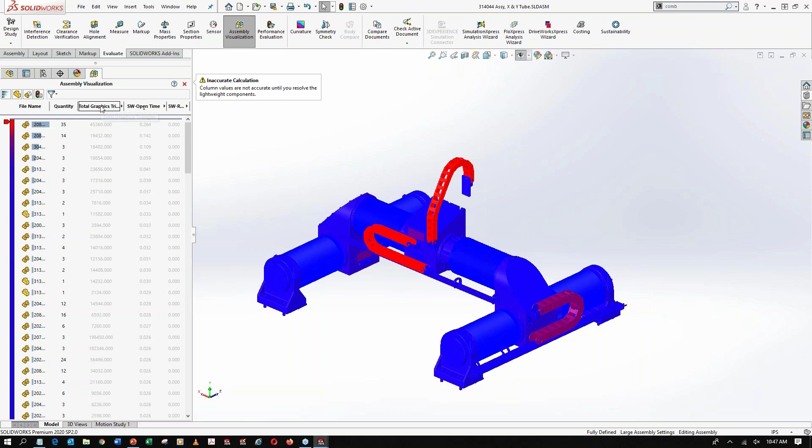And you see in this scenario, the one that opens the slowest is this IGUS chain, which is kind of to be expected, especially because there's a lot of moving parts in there. You can also go look at the total number of graphics triangles. This one's interesting because there's only 3 of these, but it's second in the list of graphics triangles. So if we open that file, we can take a look and see what it is.

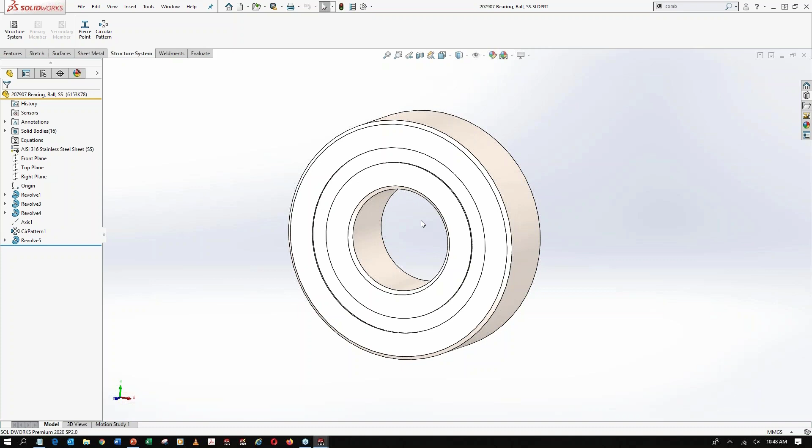And to me, that's not something that should have that high of a graphics triangle count. So this is something that you might want to go down and figure out exactly why it has a high number of graphics triangles. One thing that you can do is you can go into the gear, you can go to the document properties, you can go to the image quality slider. You can see it's up here kind of in the middle. You might want to slide it down and hit OK, and that can lower the number of graphics triangles.

So put that one in your back pocket so that if you have an assembly that's running a little bit slow on you, then maybe you run the performance evaluation and the assembly visualization so that you can exactly figure out what's going on and it's not just a guess. So I'm going to close this drawing as well.

And the last thing I want to talk about is whenever you have complex designs at the assembly level, not necessarily at the sketch or the part level, but at the assembly level. Maybe you have some robotics and you have something that has a bunch of angles of articulation and you can't fix this model in space because it actually has to have that articulation. It has to be able to move like that. Well, if you haven't been using the Mate controller for designs like this, you've been missing out.

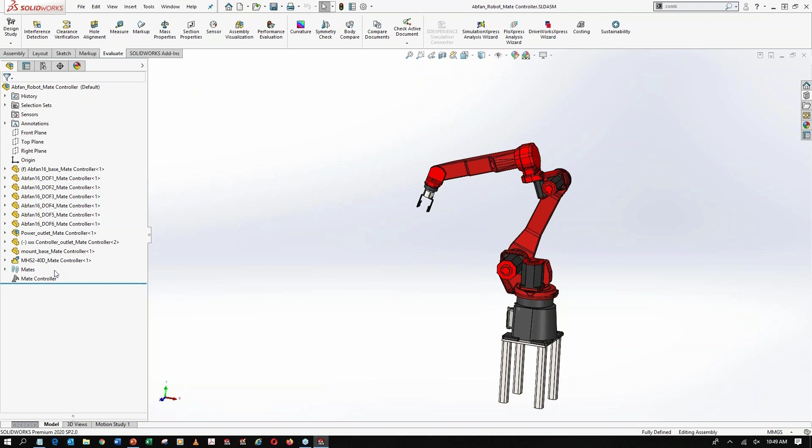There's this thing that you can launch called the Mate controller, and it has specified positions. So you can see there's a home position, there's a position over object, there's a pick up, and then there's a closed jaw, and then there is a lift. Once you lift this, now we can add more positions. We can say we want this to be position 6. We don't have to take the time to name it right now.

And in this one, we're going to rotate the base and we're going to change the upper arm angle. So it's going to lift it up a little bit and I'm going to update that position. New position, position 7. And in this one, I want the forearm or the wrist angle to change. So we're going to change our wrist angle to be up and I'm going to update that position and make a new one. And on this one, I just want the gripper to open. So we're going to open that gripper and update that one.

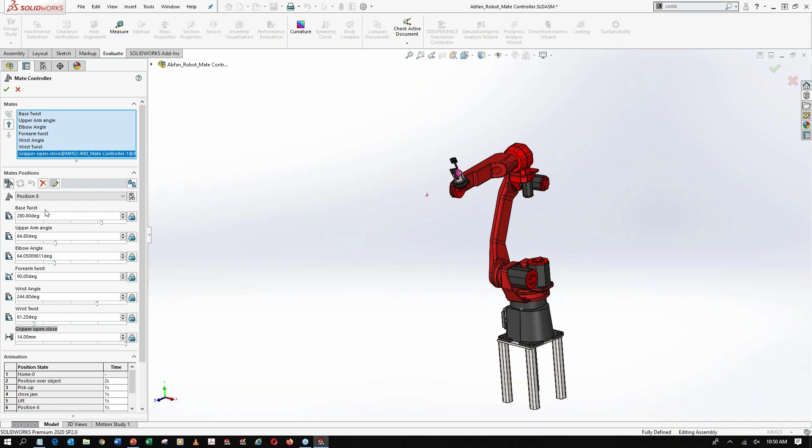Now, a quick trick if you're going to use the Mate controller is I can go back to home, make a new position, position 9. So now home and the last position are exactly the same. Now, what SOLIDWORKS does is it can then interpolate between all of those fixed positions to create an animation. So if you've ever used exploding for animation, it's really that easy, except way easier because it's going to collect all of your limit distance, limit angle mates, and allow you to change them on the fly.

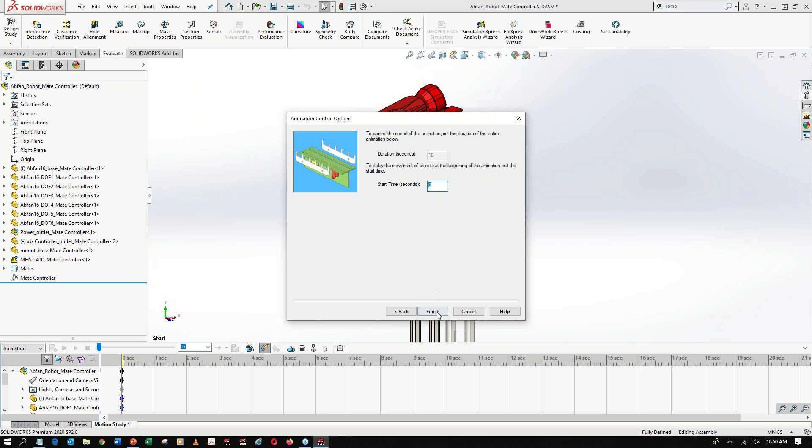And if you have to do any kind of kinematics or motion study, you can take that Mate controller and you can push it into your actual motion study. So you can import into your motion study as either key frames or motors. And you can see that down here under our mates, all of those things are captured in your motion study. So if you're having to do any type of simulation or motion simulation, you may want to heavily look into the Mate controller.